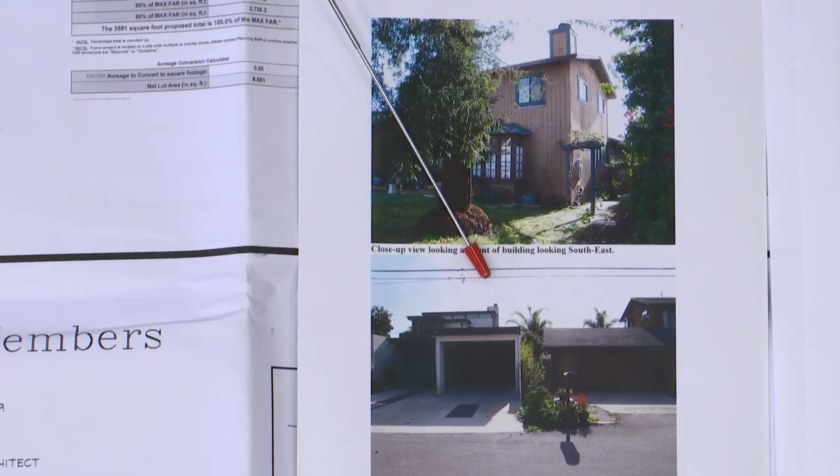Some shot of the side of the house, the west side. Here's a better shot of our neighbor to the west, so flat roofs. East side, that's the west side of the house. This neighbor is to the east. The west side neighbor is a one-story house. There's a hedge so you only see the top of the roof.

Here's a picture of a standing metal seam roof, which is on Cliff Drive, approximately there. A couple different angles, and then there's a standing seam metal roof that's on Flora Vista, somewhere about here. And so in the neighborhood, I could only find two, not going beyond what I thought was the neighborhood. I found another one. Oh, I don't visualize it right now. Okay, so there's already a precedent for metal roofs on homes.

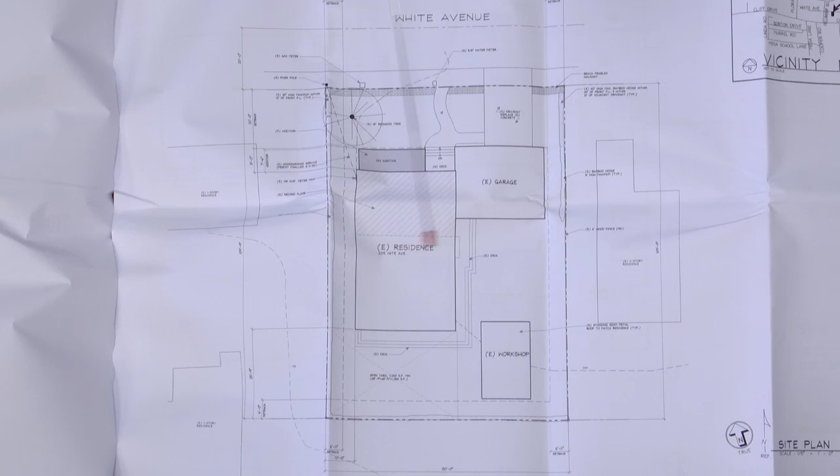So here's our site plan, and here's the workshop, the detached workshop. The two-story element is over this area right here, with a one-story garage and one-story back area and one-story workshop. Floor plan.

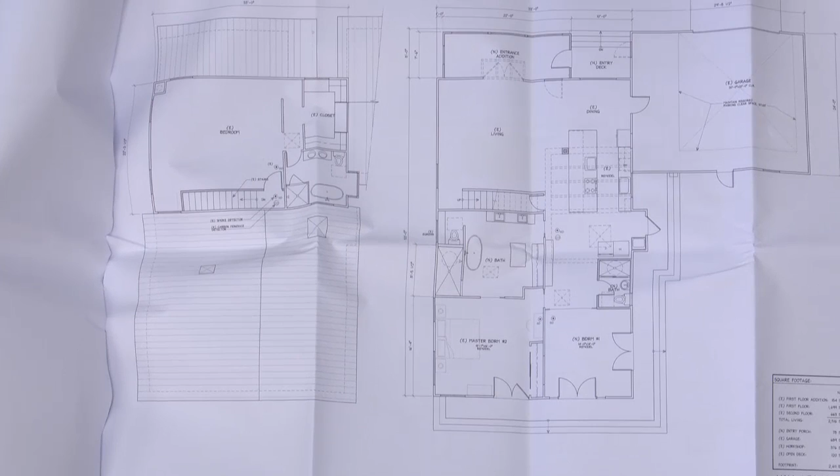Now, this is all existing, right? All existing except for what we were proposing to do, a front addition, this area here. So right now, there's that bay with the front door. Right now, this is an existing bay, and we were proposing to do an entry addition with the stairs going up the side and in, so that when you come into the house, you don't come in and it's like a straight shot through. I see.

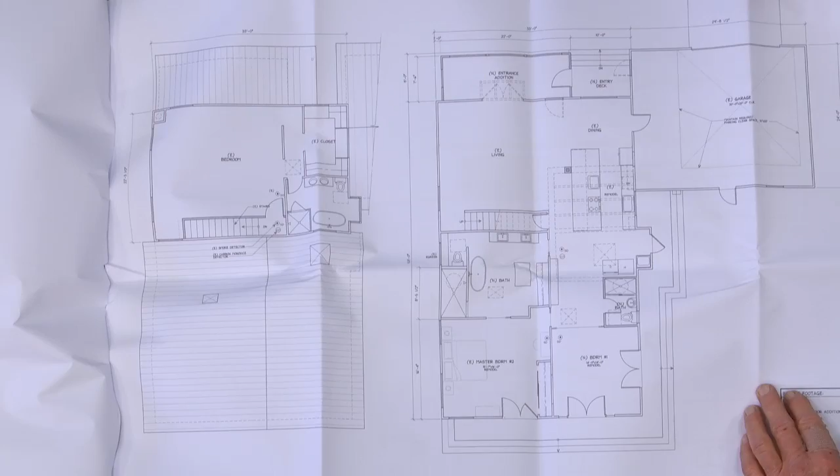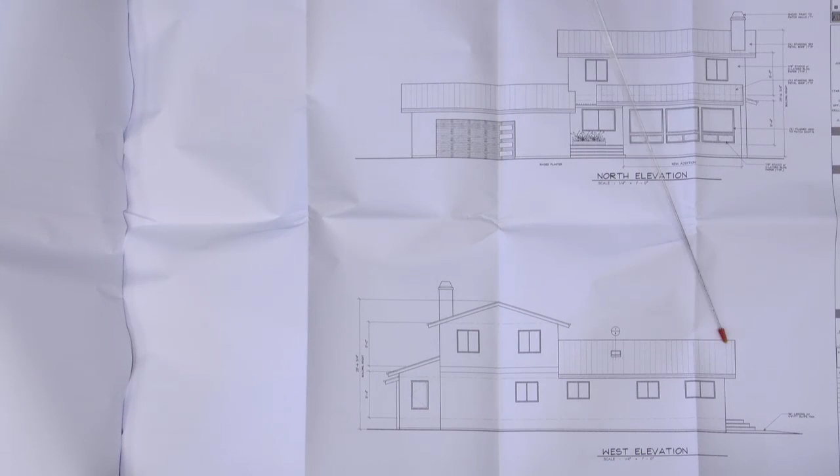So here's the house with the standing seam metal roof. Of course, this element isn't here. So metal roof over the garage or the main residence. And the colors that we're proposing. Oh, and we're going to do a new garage door. Right now, the existing garage door is not in good shape, so I'm going to do a more modern door.

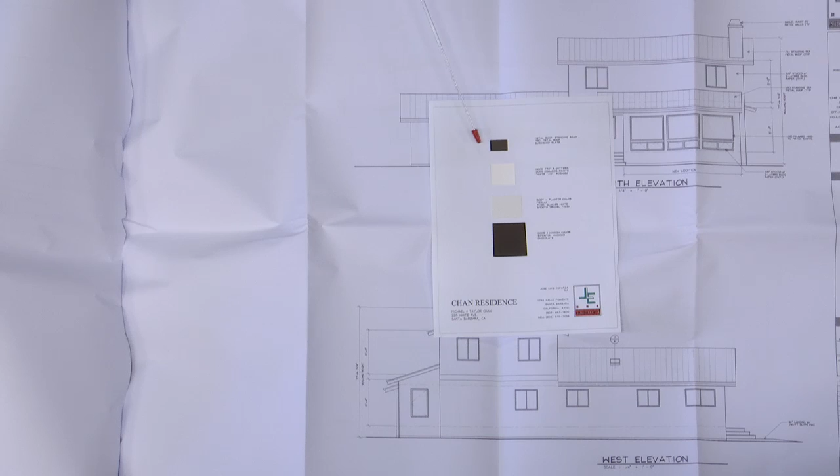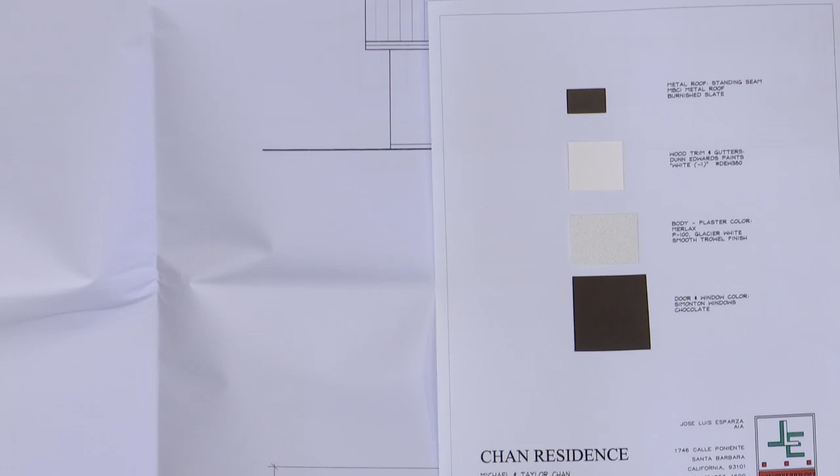So here's the roof colors that we're proposing. It's a burnished slate metal roof, standing seam metal roof. The trim will be white. The plaster will be also white, smooth trowel. And the existing doors and windows are this chocolate color, so it almost goes with the windows and doors go with the roof.

No, all the doors and windows are existing. We'll come to questions here in a second. Okay, so that's your presentation.

Okay, and we're here to look at the standing seam roof. Is there anyone in the audience wishing to address this project? David, did we get any written correspondence? No, we did not. The chair will then see no one come forward, close public comment, and bring it back to the board for questions.

Mr. Motisha, you have a question? You're taking off all this T111 and plastering the whole house. We're actually going to nail the T111 and put the plaster over top of that. The way that the windows are installed on the house is they have a trim. If we can go back to one of the photos, it has a 1x trim, so they're already proud of the siding, the T111.

Yes, see, this trim hides the reveal, what the window stands out. It looks like they were done, and some of the paper was even left a little bit wide as preparation to plaster over the house.

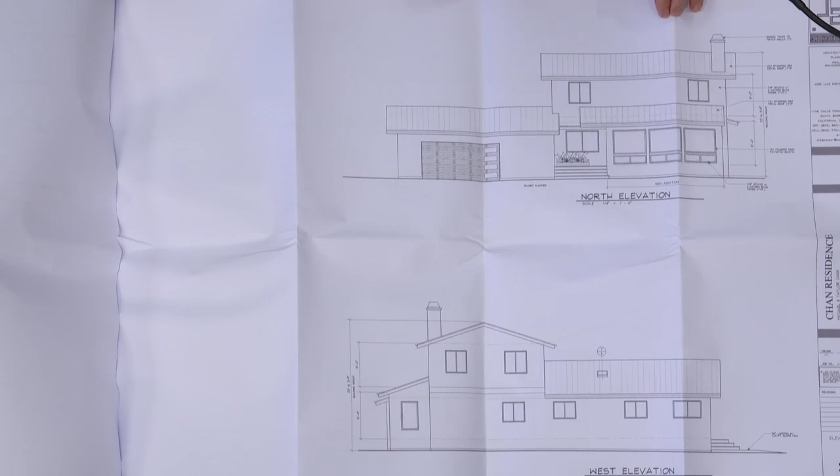Yes. In elevation, I put the line for the gutters, but I didn't put the downspouts. So I'm assuming you're proposing a white gutter to match the white fascia board, and then the downspout will also be white. And then I had a question about the bay window, but you've answered that. Siding.

Okay, and the other question I had in going down that little street, is there any parking restrictions on that street? Looked like people were parking on both sides. There's no sidewalks or curbs. I didn't see any parking restrictions. I believe there's a sign that you can't park certain days of the week for street sweeping, but other than that, I haven't seen any parking restrictions.

And David, there's no noticing requirement of the yellow sign requirement for this project? No, not for this project. Okay, have your clients talked to your neighbors about what they're planning to do?

They talked to the neighbor next door. Unfortunately, that house is up for sale. I'm not sure if they mentioned having talked to any of the other adjacent neighbors.

Essentially, you're here to try to get a read from us of whether or not we would accept the standing seam metal roof before you proceed to do the rest of your design work. Yes. All right, any other questions?

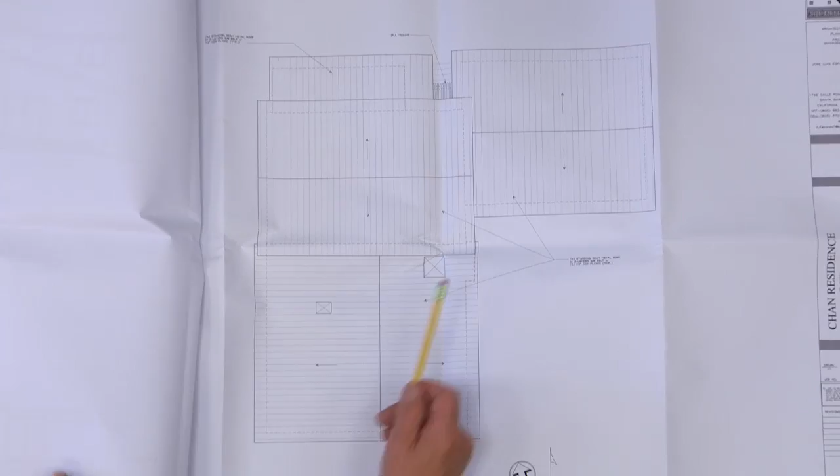Okay, any other questions? Let's go to comments. The applicant is wishing to get a read, an informal read from the board as to whether or not we would accept a standing seam metal roof in this neighborhood.

Yeah, I'd like to make a comment. I think due to the texture of the neighborhood, a standing metal seam roof at 12 inches on center, just making sure it's not a glaring surface, is appropriate.

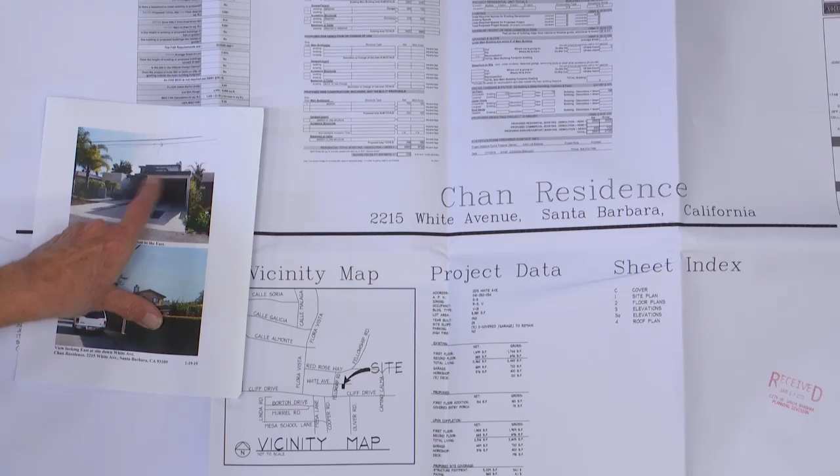The only question I have is, you're kind of playing off the colors of the house next door. This is interesting, it's got a charcoal gray and then a white. So it'd be interesting to see, is he playing off that, or have you seen how they would look next to each other?

Actually, he did take that into consideration, but he had photos of other houses. I'm not sure where they're located, but I'd like to see that combination - kind of like to see how he's at this. In my mind, it's hard for me to see a white trim with that.

And the other thing, I'm kind of wary of T111 because that stuff rots really badly. So if you're going to cover it with plaster, make very sure it's waterproof, because I live in a unit where we had to replace every bit of it because it was falling apart.

We do need to have it inspected and replace whatever panels, and do the Tyvek or double paper over that, and wire. Yeah, just be careful doing that. So you'll try to use some of that as shear? Yes, shear element, so that we're not altering the structure of the existing house.

My comments - other comments? I agree with Brian, I think the neighborhood is eclectic enough. Every house is different, and every roof in the neighborhood is different. There are lots of flat roofs, asphalt shingles, tile roofs.

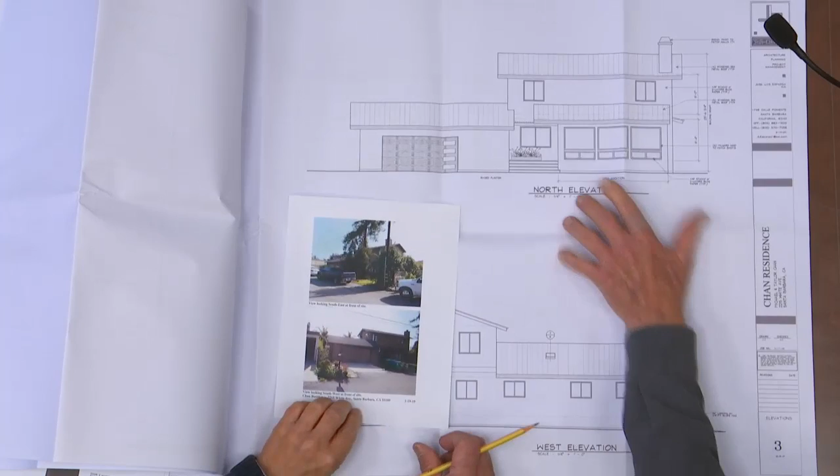I thought about that too, why this. But architecturally and aesthetically, I think it's not a problem. I think the reason the roofs are different heights is because the garage is a different height at the floor level. And to bring that over, you would maybe emphasize the fact that the roofs are different. Yes, doesn't bother me, I got it.

Any other comments? Go back to the AstroTurf issue. One of the things we'll probably be looking at when you come back is that you are moving out into that front yard with this addition. So we typically are going to want to see how you're going to deal with the landscaping around where that addition is, at the minimum.

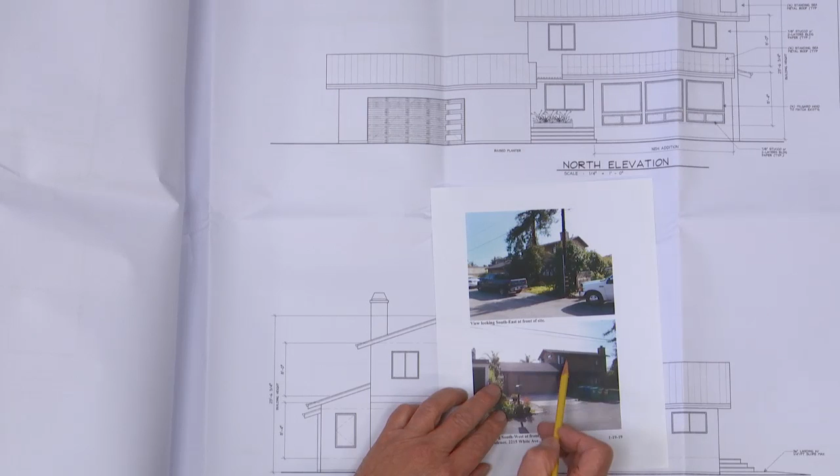The other thing I was puzzled about is the way this is drawn. It looks like the garage door is being moved over because this is in the center of this element, so it's just a question. Also, the roof, the way you've drawn it, the way it shows in the photograph, looks like it's coming across here unless that whole second floor is moving forward. So maybe just something to check as you do your drawings.

My only comment is I agree with my colleagues that in this particular neighborhood, I'd want to make sure we're going to need to give a motion because he's asking for a general direction. We're not giving it a formal approval, but we probably need to define the neighborhood. The applicant attempted to do that. If we agree with that definition, that's fine, but we should put that into the motion.

My only other comment is part of the challenge of these standing seam roofs being non-reflective is that even the dark colors are reflective and shine, in my opinion. Having gone out and looked at several of those dark colors, they can be problematic depending on where they are.

I agree with my colleagues, I think in this neighborhood it's not an issue, but just looking at the final color rendering is going to be important. And then the last comment is that I don't particularly mind your clients wanting us to make everything else white, except if you buy white gutters, what turns out is that white doesn't quite match the white that's on the fascia, that doesn't quite match the white that's in the stucco, and it may look a little weird to get all these whites to work together. I think that's maybe what bothers some folks, so you might want to look at that.

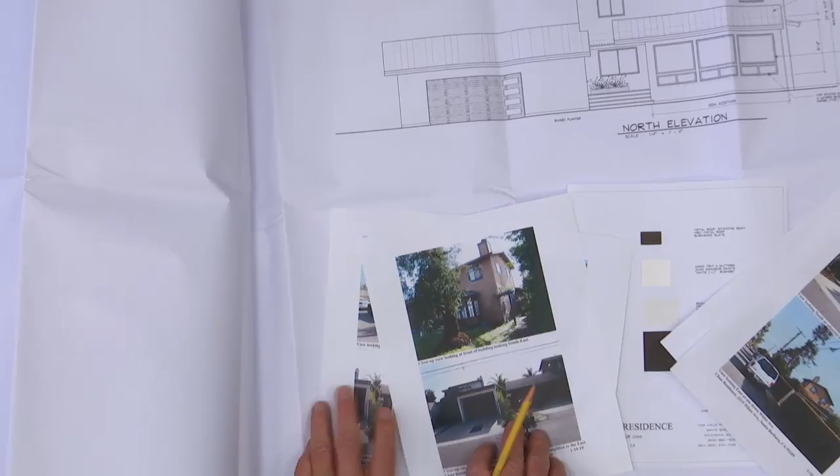I'm sure a question's going to come up when you do come back about the fencing, because I noticed there's a gate that's trimmed out in the current rendering of the house. I don't know where that little drawing went. There's a gate to the garage side and a fence that comes down, you can see it a little bit in this photograph. Is that going to stay? Is it going to change? Is it going to get painted? Whatever that is, that'll be kind of part of the things we'll look at when you come back.

Do we have a scale here? No.

I think that's drawn too long. Yeah, something's not quite right there. But anyway, he'll verify—6 feet, 8 feet too long, the whole garage. He can get that corrected when he comes back.

Okay, with that discussion, does anyone have other comments? If not, the chair would look for a motion that solidifies the board's general opinion on the acceptability of a standing seam roof. Any other notes for that motion? I'd suggest that if the maker of the motion is saying the standing seam roof is acceptable, you define the neighborhood—for guidance, you can look at the vicinity map on the front of the application.

Anybody able to make a motion? Yeah, okay, I can make that motion.

So we'd like to give your project positive comments for your standing seam metal roof. I think it would be beneficial to restudy your color choices for the gutter and trims, contrasting with the color of the metal seam roof. Also, really study non-glare as much as possible for this standing seam metal roof. And we'd like to define this eclectic neighborhood of Cliff Drive, Fellowship Road, and White Avenue. This will come back to the full board.

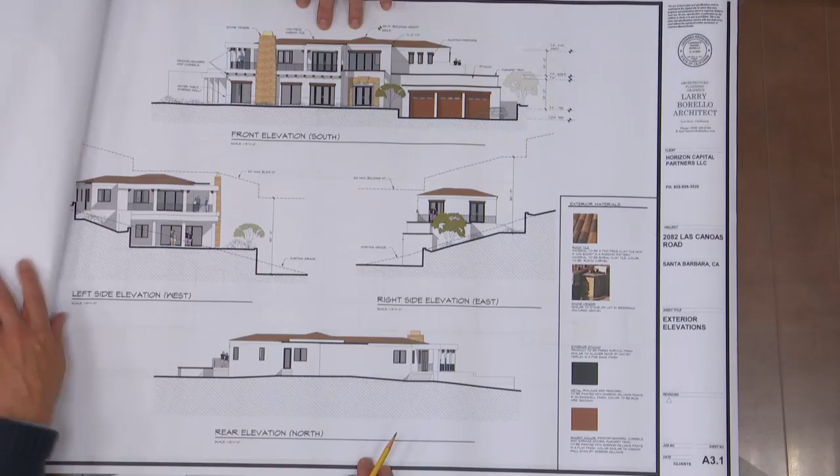Okay, so if you look, the floor plans didn't change, but the exterior, I've added the tile roof. And there is still some built-up roof, but maybe a third or two-thirds of the house is now a sloped tile roof, all stucco, and then incorporating some stonework that matches the style and color of the site stonework.

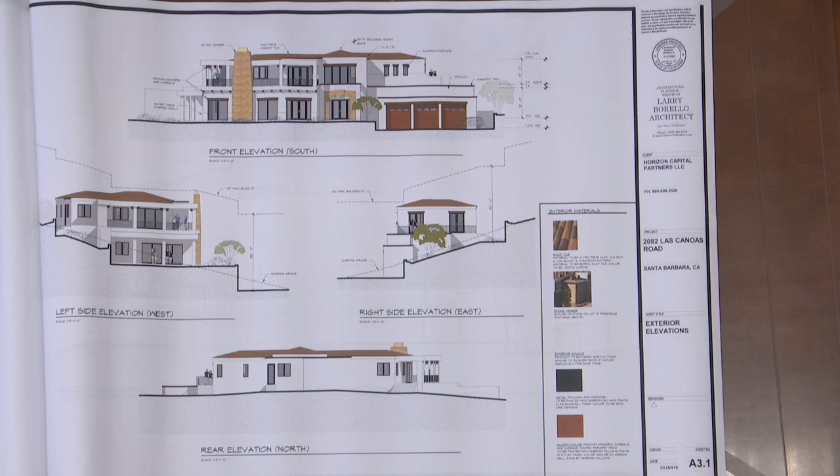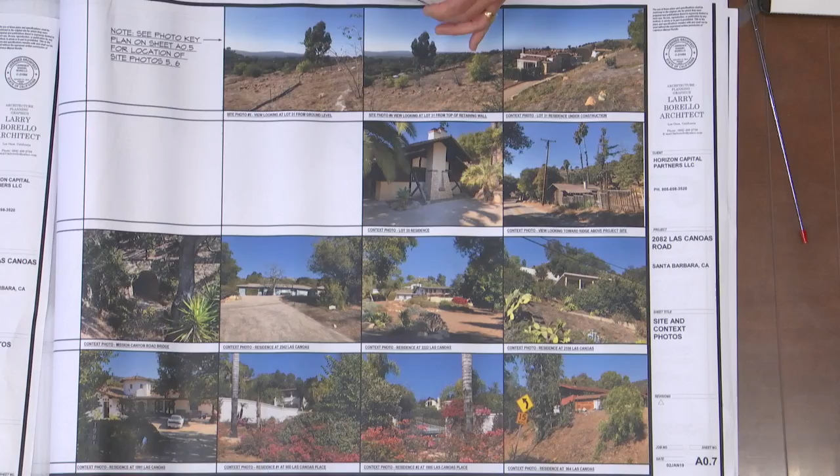And I did a little bit of homework. I went through the guidelines, and as the comment suggested, I went to take a look at the neighborhood. I took some pictures, I think they're on the third page. And what I did discover is there really isn't a distinctive style in that neighborhood. Your guidelines actually address that issue: neighborhoods without distinctive architecture should be designed to lead the neighborhood toward designs that are harmonious with the Santa Barbara distinctive built environment. So I thought the mission style would be the appropriate style in our situation.

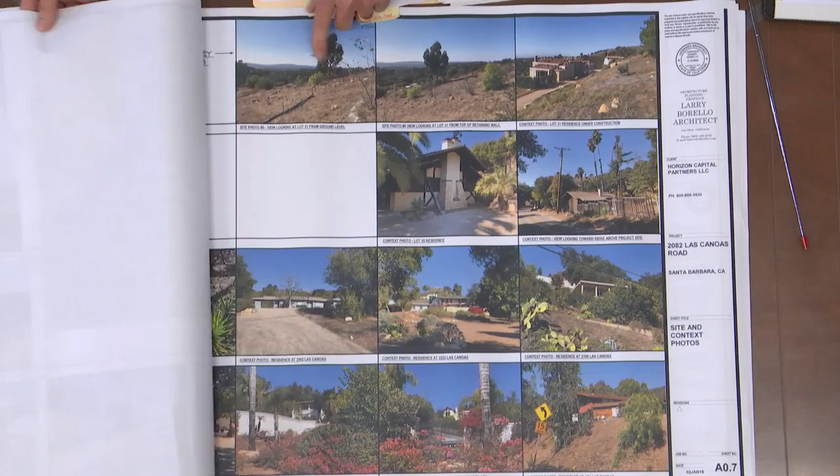So that takes care of the first two items. And then the third comment had to do with privacy issues with the neighbor to the west, which on sheet A0.5 would be what I identify as lot 31. And my site pictures on the next page, if you take a look at photo number 5 and 6: 5 is on the ground, right in front of the existing retaining wall, looking towards the neighbor's house. And 6, I actually climbed up on the retaining wall and took a picture in the same direction.

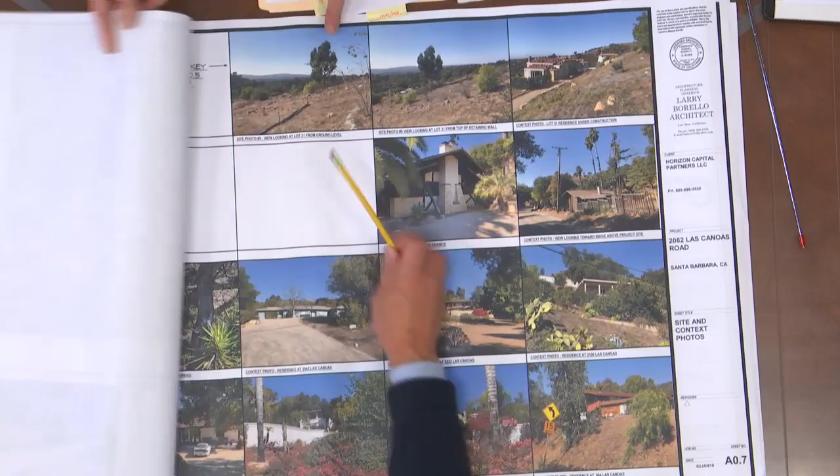So just to orient, that tree—yes, that would be this one. Okay, so the house you can see is off down below towards the left of that tree. So that's the house in lot 31, okay?

And this is—I climbed across the neighbor's property towards their driveway to take this picture. It's a Tuscan style, attractive house. Our house will have a similar tile colored roof, and we're going to pick up on the stonework as well. So I think it would be complementary to that house.

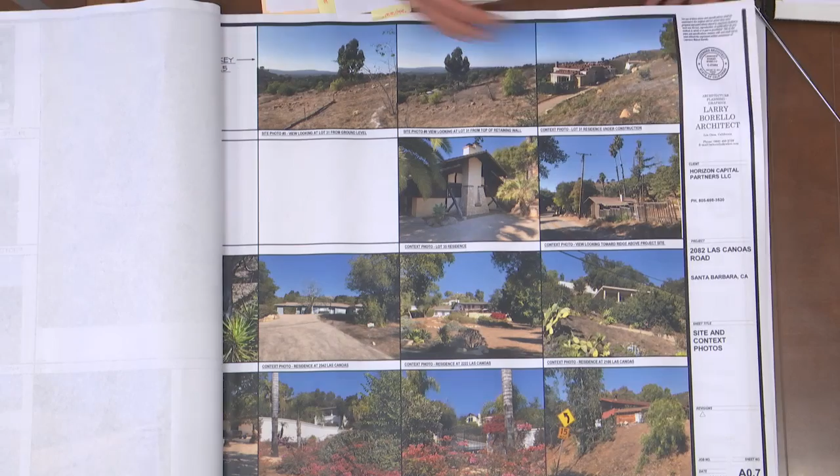But then if you go to the last page, to help look at the privacy issue or concerns, I have those two pictures again here with the close-up. And then the site section is looking towards the front of the house—it's conceptual, but that house is about 200 feet away and 50 feet lower. So we're going to be clipping the top of the roof, looking at their house.

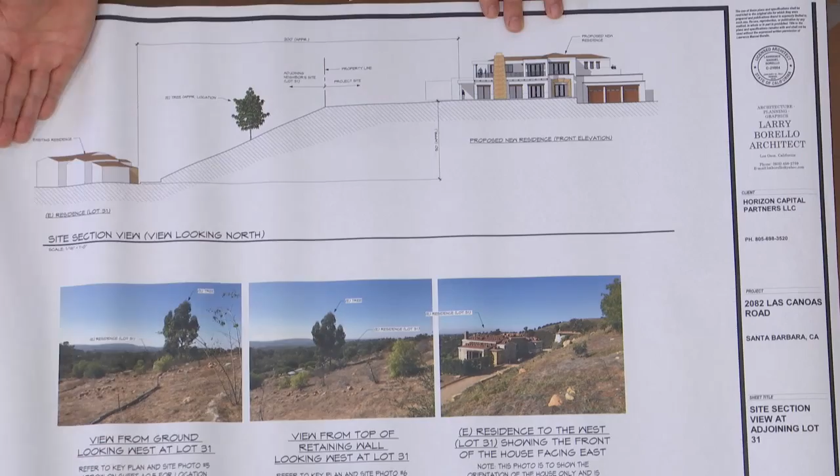And plus, if you'll notice, their driveway is facing our property, their front door is facing our property, and their private spaces are on the other side of their house. So they did a nice job probably anticipating somebody up higher, and we won't be looking down directly into their private space. Also, our view is out in that direction too, so there's a balance between making use of our view and their privacy. But because of the distance and the drop, it's not as big of a concern. And one more item regarding a privacy issue in the guidelines.

We talk about, under the landscaping guidelines, an appropriate way that should be considered to help create privacy between neighbors is the use of shrubs and hedges. And I think we have the opportunity to do that along the property line.

And the final item regarding the Tier 3, I've added a note on the site plan saying we would address any Tier 3 comments. And that's the end of my presentation. I think Kevin, anything you need to say? Sure, thank you.

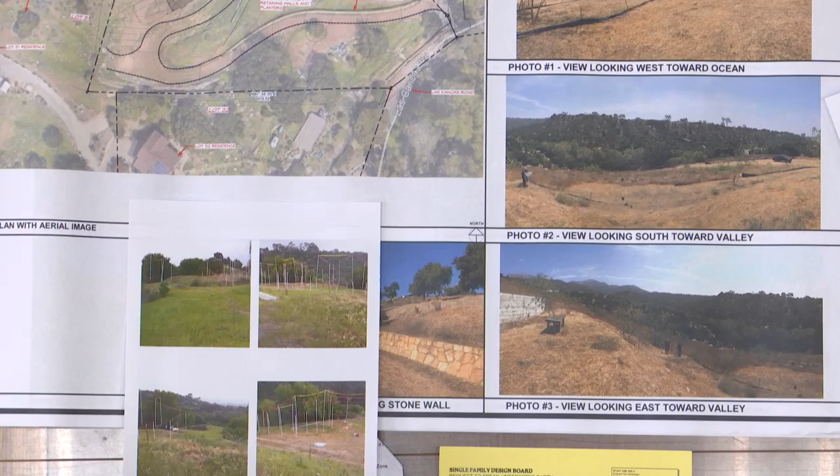And so it's really hard for my husband and I to look at this plan and really see what kind of view they're going to have of our place. And they thought, the architect thought that our private space was on the other side. It's actually not. Are you talking about Lot 31? Is this house under construction? Yes, okay, yes. We have this guest house, and that's our main house. Okay, and this here, I don't know if you're able to see, if I'm supposed to do this on this one.

This is our private space, our master bathroom, which is what we were worried about the last time we showed up for this in October. We've grown some hedges to block the view from the house that shares our driveway, but with a house up high, I think they're going to be looking straight down into it.

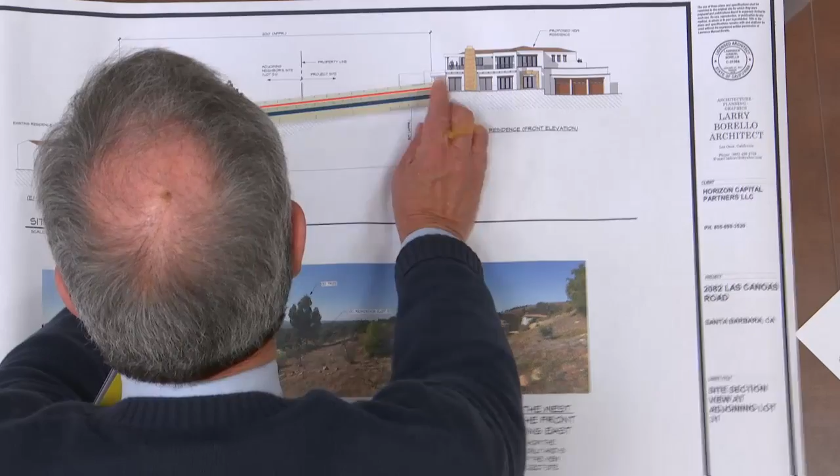Let me look at this. So if that's a 6-foot-high person, and they're going to look straight down into your house, that's the line of sight. They're looking over the top of the roof. The one place they might be able to look down into here is if you scale this at 6 feet. This is what it's talking about right there - that's our master bathroom. If you're 6 feet tall, you're roughly right there. You have to be right at the property line to look down here.

It's 200 feet away. Well, it's not the distance so much, it's the angle, and I think they're going to be looking straight down into it if they stand at the edge of the property, but if they're back here, what this demonstrates is they can't see this house.

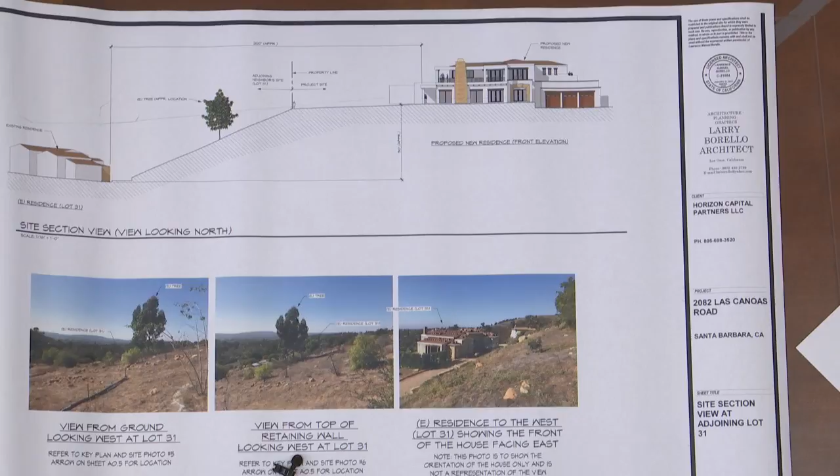There's no story pole recommendation here? We'll have that conversation. We would really feel better about it if there was one. I'd also like to say that we went through incredible expense to build this.

I wish you guys would go up there, it's really special. We have been up there, ma'am, we understand how much money is being spent. So we just would like to have the house next door do the same. Thank you. Okay, anyone else in the audience?

Okay, let's bring it back to the board for questions. Who has questions?

Can you show us on that plan where along the property line your hedge will be, in order to both assure the neighbor of privacy and to illuminate for us where that is, and if you know what the hedge material is going to be?

I'll answer your second question first. We haven't gotten into that. I don't see any hedge design drawn yet. No, we haven't. I don't know, where do you see a hedge? They were describing that he was talking about a hedge, but we don't have a landscape plan yet.

But which property line can you show us? Is it the one adjoining their property? It's here, correct. So when you plant your hedge, that will help increase the ability to screen the properties.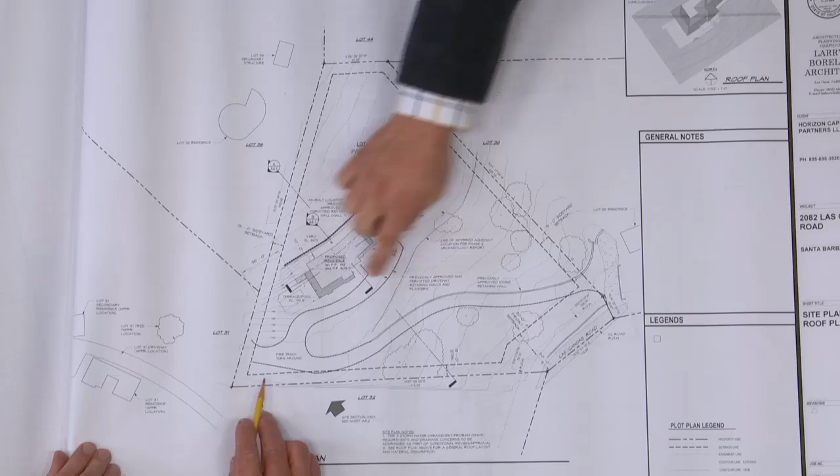I have a question - this is weird, is this like an access to the other property? Is that an easement? No, that's just the driveway up, and then it just stops here. Well, there's technically a hammerhead turnaround for the fire department, that's the reason for that. It's just not really developed yet, that's sort of a rendering.

All right, other questions? If not, let's go to comments. Who has comments? Yeah, I have a comment. I hadn't seen it before, new to me. And your property is 3 acres? Yes, yes.

Well, this is a question for the board, and I'm open - this is the reason I'm bringing this subject up. Why are we... I don't want to use 'adamant'... why did we change the style? He read it out of the guidelines. No, why did we feel that... hold on a minute, you want me to answer or no? Let me finish a comment before you respond. Yeah, I want to hear your comment, your response.

We've done this several times, changing drastic styles of houses on 100, 60 or 200-foot lots right next to each other, where everybody's looking down on the property, and neighborhood compatibility didn't fit the neighborhood - putting a modern house in. We've changed things like that.

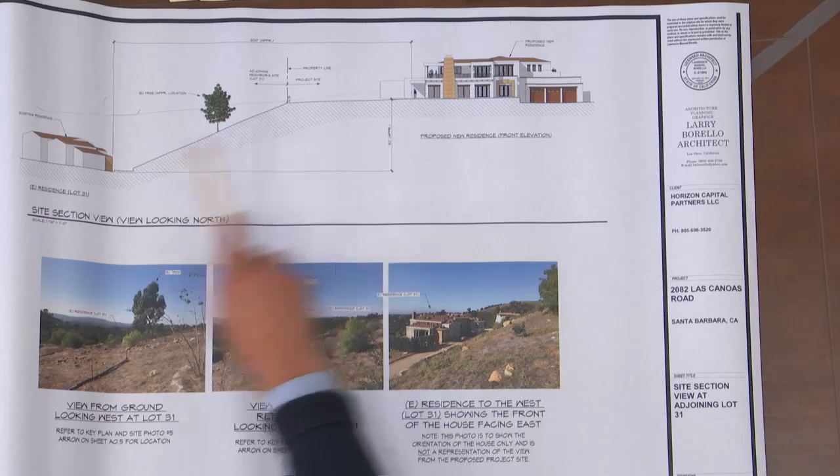I'm of the opinion that all of these homes are far enough separated that unless somebody really wants to look into your bathroom window, you're not going to have that case anywhere in this canyon. And yes, with a little additional landscaping, we're 200 feet away. I think this line of sight really demonstrates nobody from this house can see that house, and barely see the roof. One of the things we always have to be careful about is photographs, close-ups, et cetera, can be deceiving, so you have to make your judgment on what you've seen on site versus photographs. But I think I can safely be assured there isn't going to be a privacy issue.

With regards to story poles, yes, they are certainly used by this board from time to time, but the board understands that requiring story poles is a very expensive proposition. They have to be done by a certified civil engineer, sets of drawings have to be filed, there are inspections going on, and there are 3 different levels of story poles we can choose from.

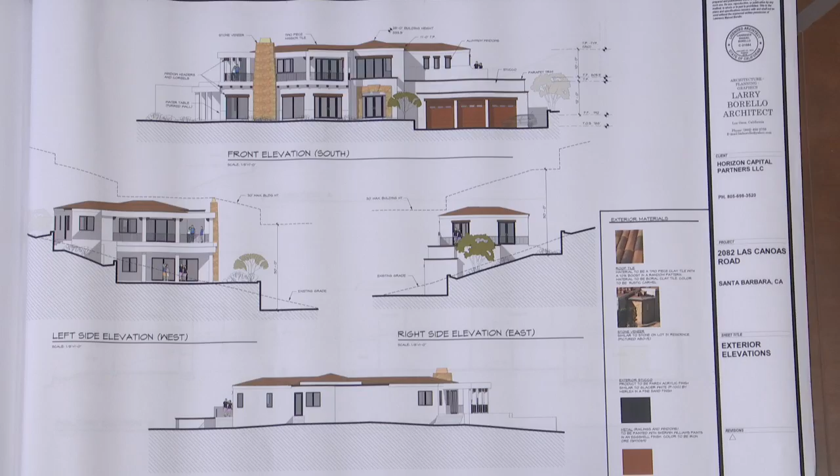I would like to hear my fellow board members weigh in. I don't believe story poles are necessary for this application. I think the architect and the owner have done an admirable job of listening to us about architecture that can be compatible with the neighborhood. Again, as we go through this process, the definition of neighborhood should be addressed. The home still has a contemporary element to it. So I'm satisfied that the architect has addressed our concerns, that the applicant has addressed our concerns.

There are 2 things, though, one technical question I need to ask David. David, this has been presented to us today as something we're not able to make any final appealable decision on, is that still correct? That is correct, but since the agenda was published I had more opportunity to review the environmental assessment. It is okay for project design approval, but because it wasn't agendized as such, we can't grant that approval. I would recommend that if the board feels the project is approvable, they make that recommendation in their motion, so when the project comes back, this board can be ready to take that action. And the board also has the ability to send this to consent calendar. That is correct.

Two comments on the ability to give you any kind of approval today. Technically, David just said we can't, so that's a concern, because obviously you'd like to achieve that today. But if the board is inclined to accept this as an acceptable design, we have the option to send it to consent calendar, which is the 2 people reviewing every Monday at 11 o'clock. Currently myself and Lisa are the 2 reviewers, so that could go to consent calendar.

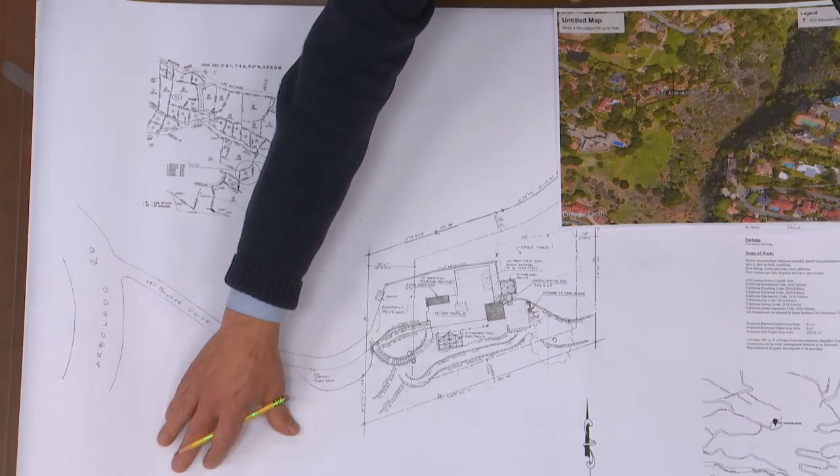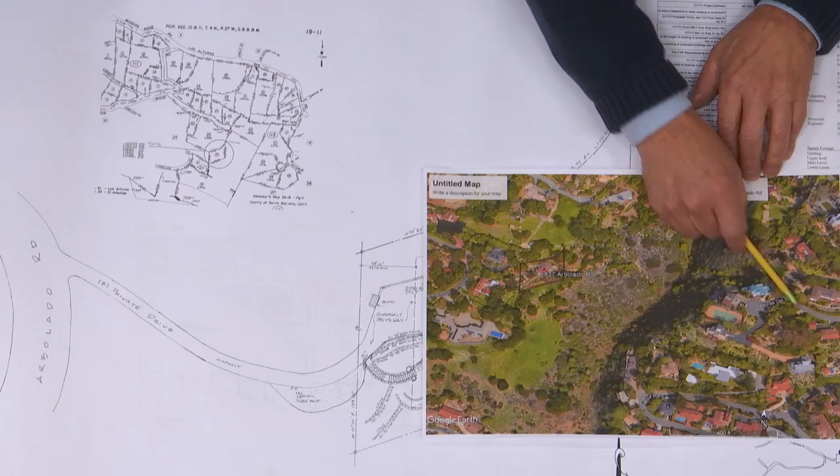Let's start by orienting you. I'm going to use two documents here. One is the plans - this is up on Arbolado Road. The property sits in from the roadway, with residential property on both sides. This is the aerial photograph, which may help. This is the curve on Arbolado Road, with an entry driveway here. This is the house, which sits overlooking the canyon that drops off the Riviera. The next closest street is Loma Media, which winds its way up into this dead-end street and continues all the way up through here.

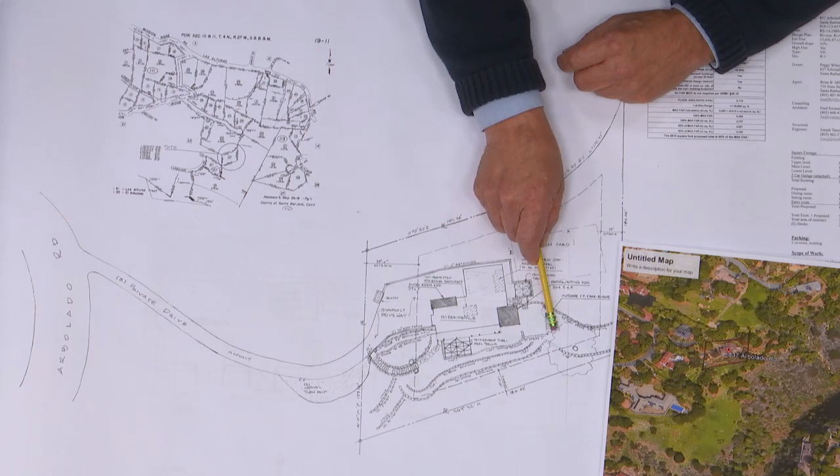The project consists of two additions to the existing home: one is the reconstruction of an open-air entry porch into an enclosed glass gallery entryway, plus a one-story dining room area and a second floor sitting room off the master bedroom, which sits right here. There are also some small minor additions in the yard for an outdoor gas-fired fireplace and a gas-fired barbecue with a little counter for food prep.

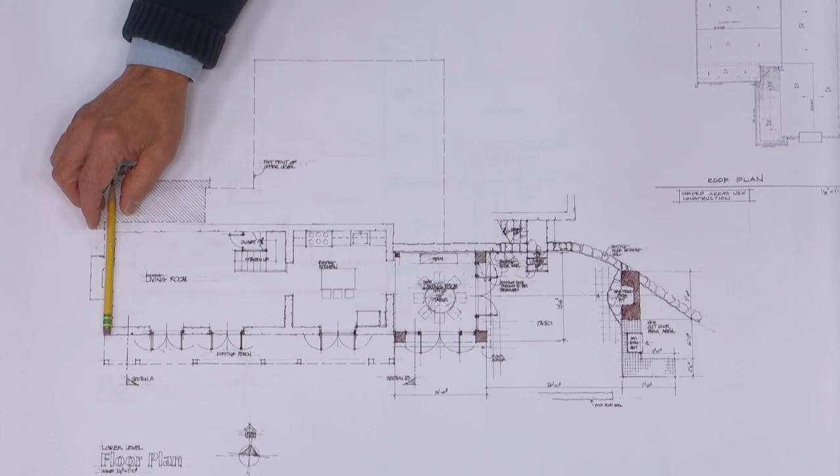Going quickly through the plan, this is the existing lower level of the house. This piece was constructed, we think, back in the 20s or 30s as a stone masonry structure, probably two floors, relatively small. In 1981, it was added onto in this area, which we'll show on the upper level. The porch we're talking about is here, and the first level dining room is here, replicating the exterior stonework, with doors opening onto the patio areas, existing patio wall, and steps. We'd like to add an outdoor gas-fired fireplace, a barbecue, and a little counter area for food prep.

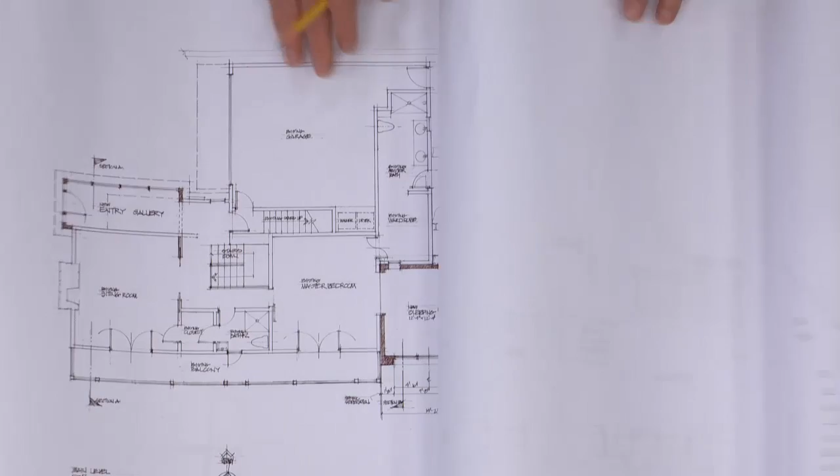On the second level is the addition, above the dining room, of a little sleeping porch or sitting room off the master bedroom. The original home was this size, with a Monterey style balcony off the front side facing the ocean. The hillside is here, the garage, and outdoor areas here. There's also an upper level above this with a couple of bedrooms and a bath that's not being touched, so it's not included on this set of drawings - it's in the existing drawings.

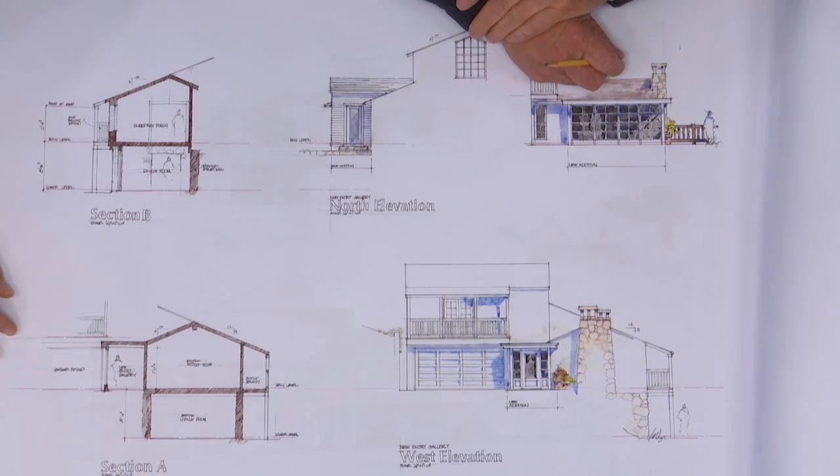Here is the rendering of the entry, the redo of the entry porch, which is covered right now. Let's see if I've got photographs - David, do you have pictures? The other set doesn't have all the pictures here. Thank you.

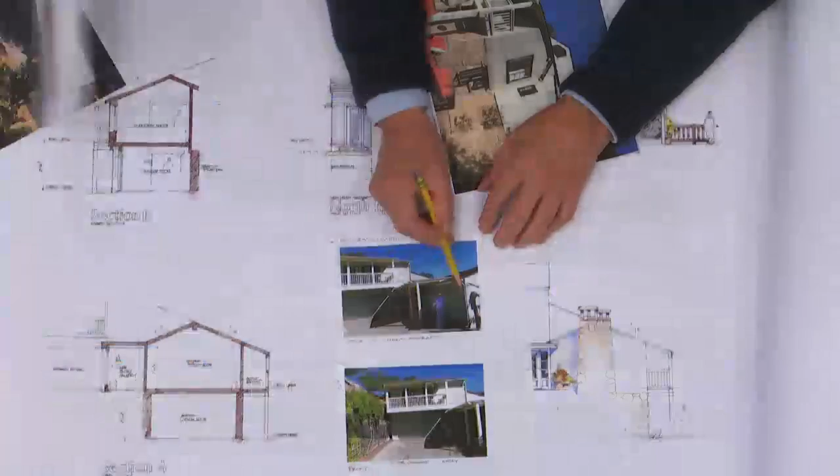So essentially it's this porch right here. We're going to enclose that and extend it out a few feet just beyond the front wall. So that's what this is, with a new door and a new readjusted roof over the porch.

Let's see, do I have... what else we got? I think that's the main one for the front part of the house.

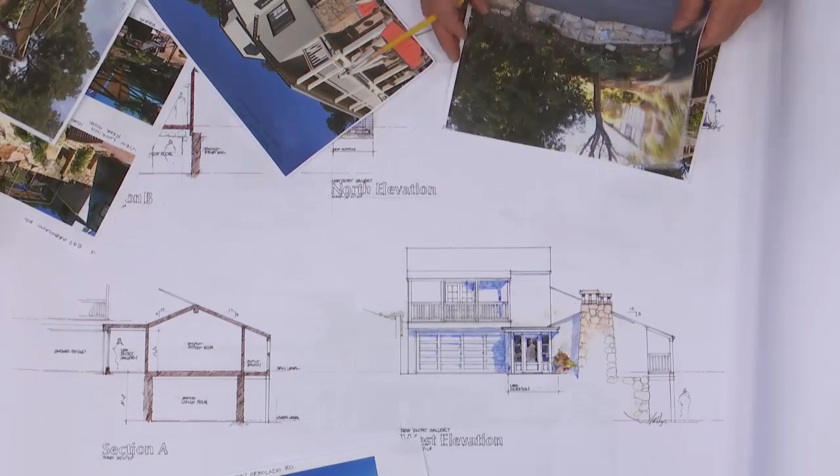This is actually the entrance off of Arbolado Road. That's the driveway coming back in. And this is the overall view of the house from the Arbolado Road side of the home.

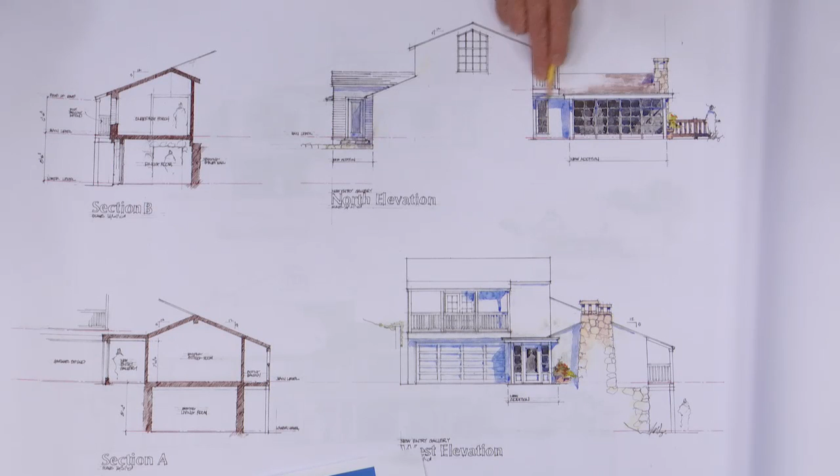Let me just go through. So this is the side of that porch, glass enclosed. A new window here, that's existing wall. This is existing roof, existing fireplace, existing upper floors, existing here. This is the new addition off the sitting room, sleeping porch off the backside.

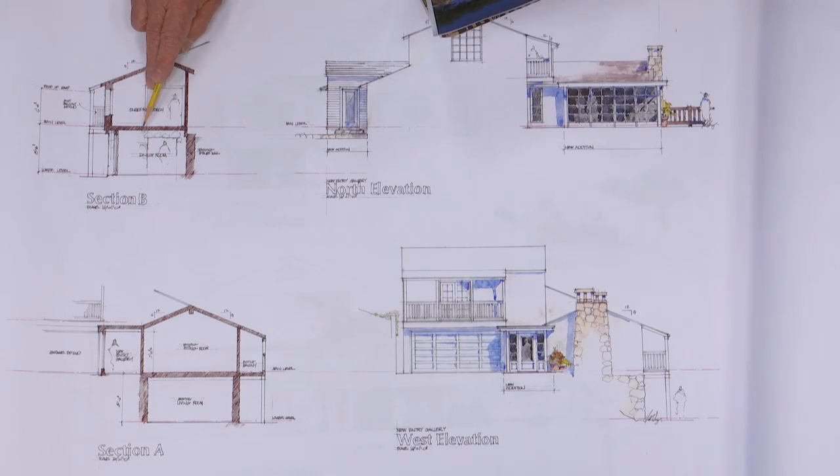Here's the sections, elevations, floor heights to plate heights. Everything's relatively low. It's interesting that historically this house was built as this rock structure, so the finished floor at the second floor is only 8'6". So the ceiling in the dining room is going to be like at 7'2". Because that's just the whole way the house was built.

And so then when the additions were done later on, again, all the plate heights are really low. So this is 6'6". Here it'll be a little bit higher just because we're trying to get it to snug into the existing roof. And I have a roof plan.

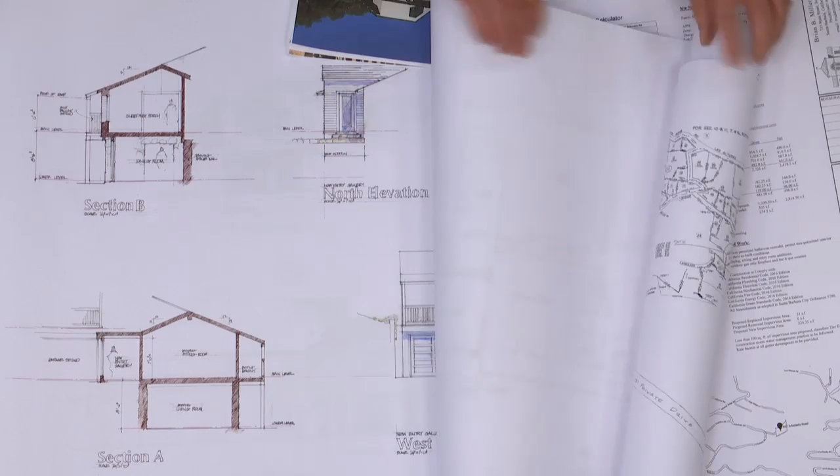We have a roof plan up here. This corner... whoops, where is it? That one there? There it is.

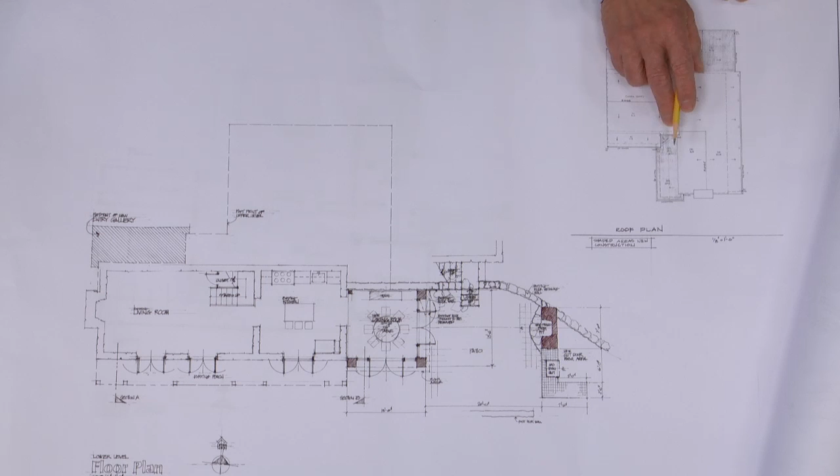So here is this addition where the dining room and sleeping porch are up on the second floor. So we're snugging into the existing roof here, and this is the flat roof over where the porch is now. The roof on the porch right now slopes a little bit, but it's like an inch to a foot slope, and we're going to flatten that out a little bit more.

Okay, so that's that. So let me show you then elevations. So we forgot to get... just stay here. So this is what we presented to the consent board.

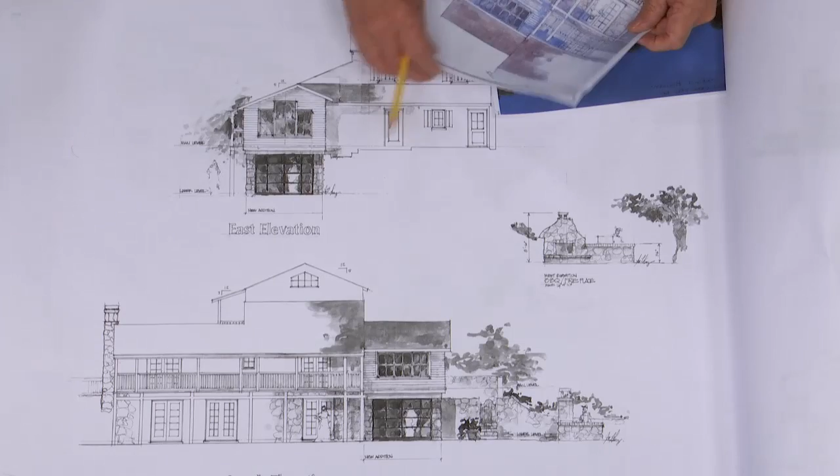These are little portions of what they look like colored. For some reason, we can't find the color drawing.

But this is the sleeping porch or sitting room off the master bedroom. So this roof just leads right into the existing roof. This is that lower level. And this drawing depicts...

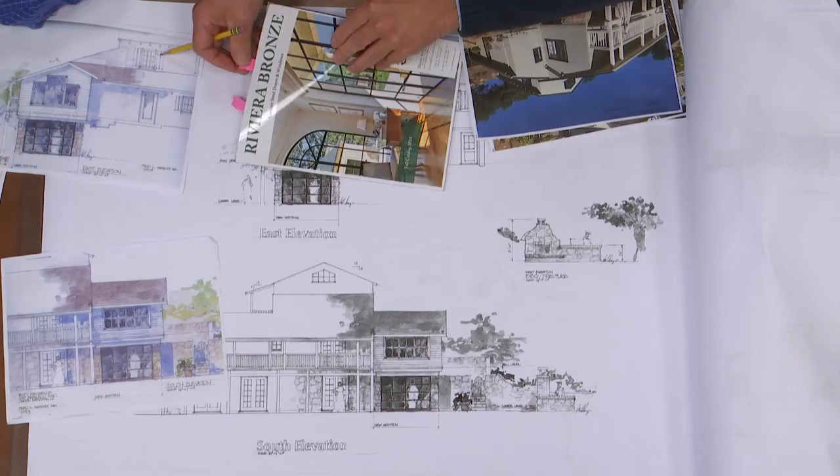This drawing off both sides depicts a steel door system, very similar to this one right off of their catalog, that system right there. Okay, so that's basically this door system here.

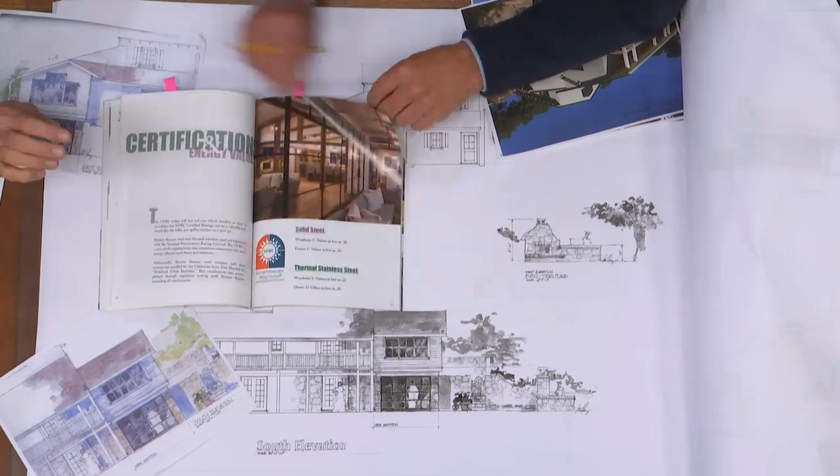And I think we got another... that's just the colors. Anyway, similar to that, that's the idea of doing that. And so, in essence, that's filling up this corner. So this addition kind of sits in here, fills in that corner.

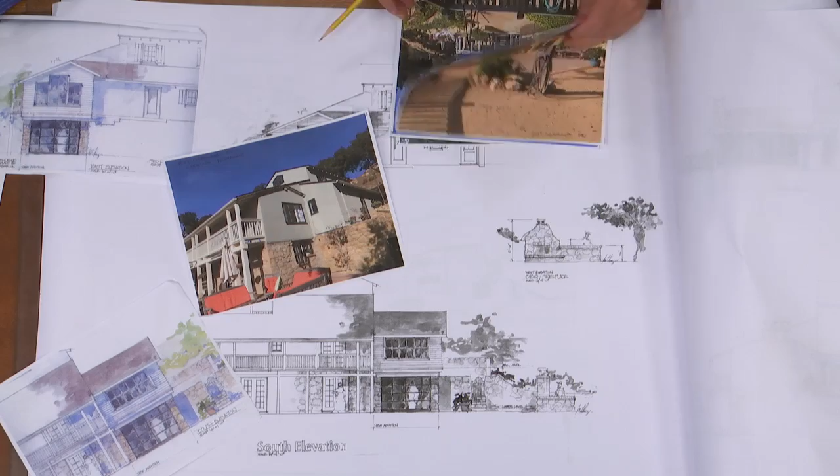The entry is in the back, and the entry's corner is in the back on the other side. Okay.

And let's see what else I need to show you. I think that's it. So it's going right in this corner right here. Yeah, it's right in there, filling that corner up. Two-story, right there, yeah. So it's filling in this corner. Okay.

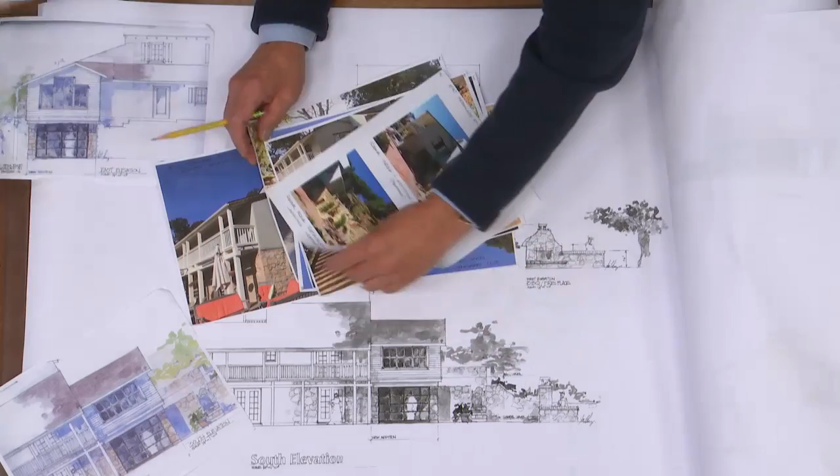So what we have here is a fairly eclectic piece of architecture that's been added to over several periods of time at different points. The addition up here was done by Sharp, Mahan, and Lenny back in '81. We think a lot of the other work was done hither and yon over the years.

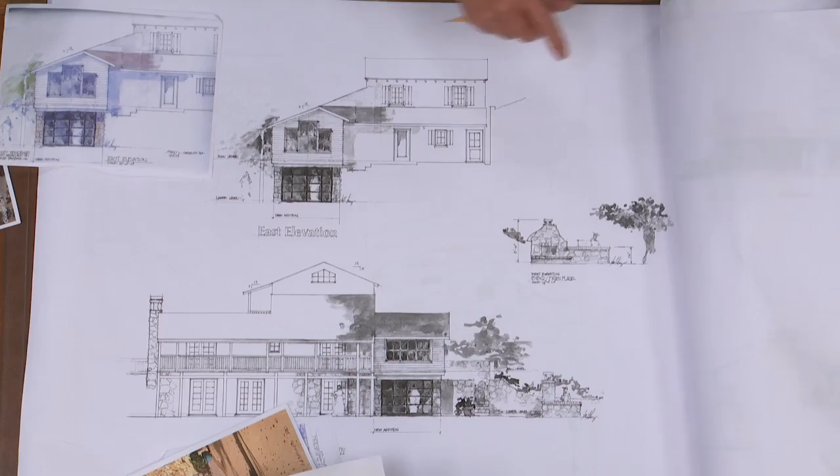There's an interior staircase that actually has to get a permit, put in by the current owner several years ago without a permit. So there's this interior staircase that has to go in that's very contemporary in look. So you can forensically just go through and see where things have been added and patched in and changed over time.

So that's what we wanted to get approved. And consent said no, it really isn't compatible with the rest of the architecture. But what I'd like to share with you is some additional examples of how people treat different periods of architecture in the same building.

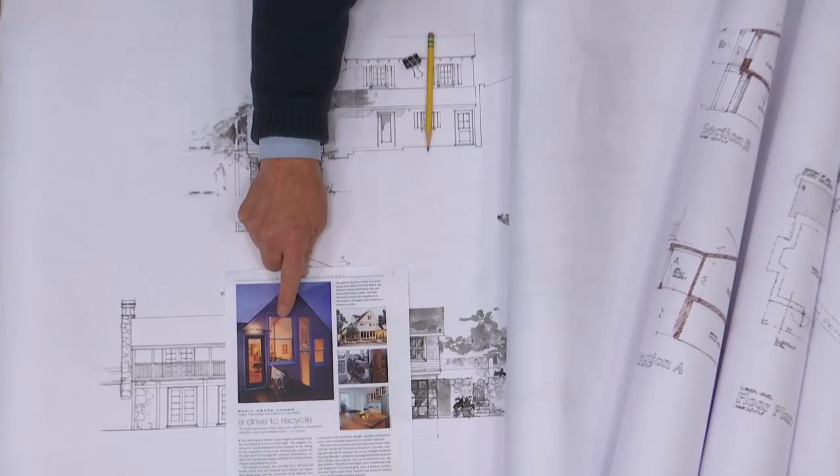So here's an example of using very traditional fenestration elements, but in a very different way. So that's not a very traditional approach to the rest of the house, which looks fairly traditional.

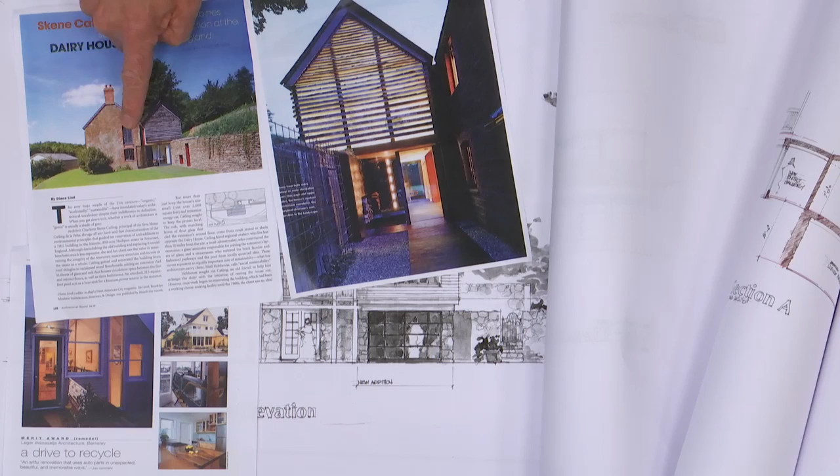Here's another one where this is an old barn structure, stone structure, with traditional window fenestrations here, but then an element that's been introduced that's contemporary right next to it.

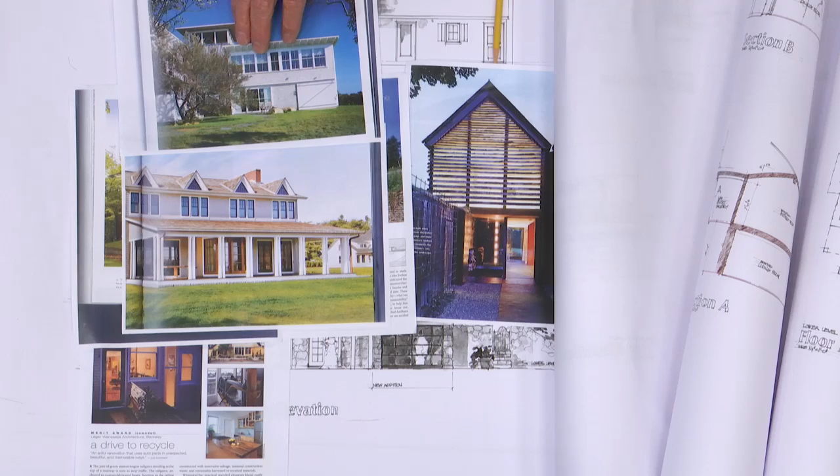So we did go off and study a more traditional approach to these sets of glass doors. And that looks...

Why are these stapled? I'm doing this upside down. So used to, that's fine. I need to see. You guys want to see these?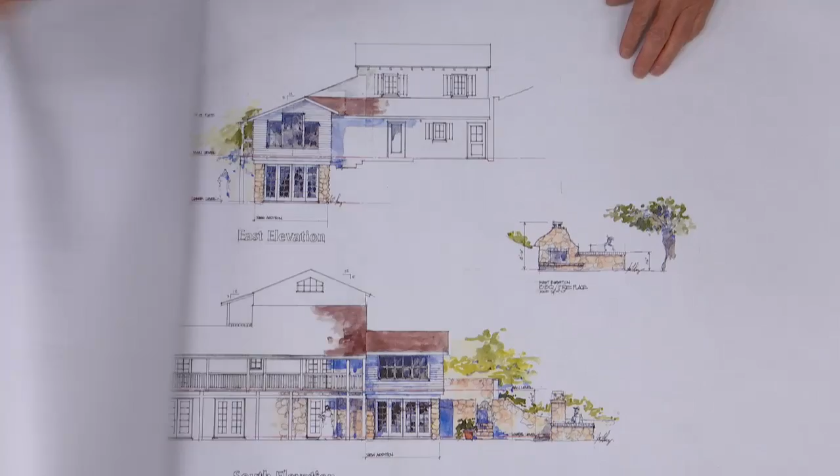So here is that drawing in color. And then here's a more traditional application of traditional French doors, 5-light French doors, clad, that would be used in lieu of wherever that other picture was, the giant steel window. Yeah, the steel windows, in lieu of that.

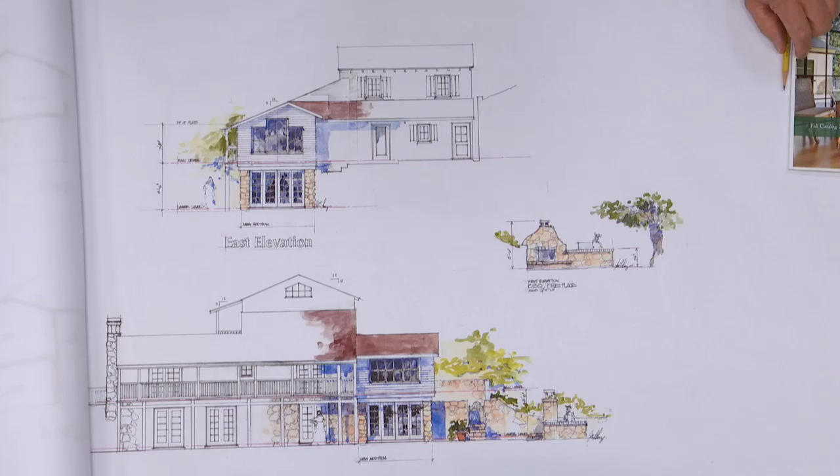The other thing we want to show you is what this looks like across from the canyon. So this is a sketch done right off of the canyon look. At one point up in Loma Media, there's a pop-out where you can look back at this property, which is hidden behind these oak trees. So it's back right in there, you can't see it.

This is the property above. This is the neighbor who actually showed up at consent calendar because she was concerned about how high this addition was going to be.

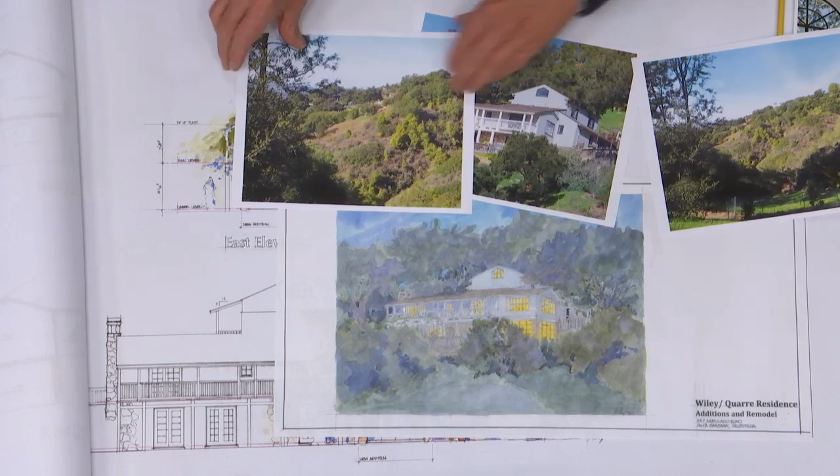This is a little bit further, where I could wedge myself in to see the site again, but it's that right there, that's the edge of the site. I'm higher on Loma Media. Then lower in Loma Media, you can see it at the turn we showed in the photograph.

Over this house. Where are we? You're looking north. Right here, that house is this house. So if you park right here, you can take a photograph. That's what this photograph is, looking straight up.

And then, using the telephoto lens, I can get a little closer, and that's what this is, a tracing on top of that drawing showing the addition. So this depicts the steel-clad window system and the wood window system on the second floor.

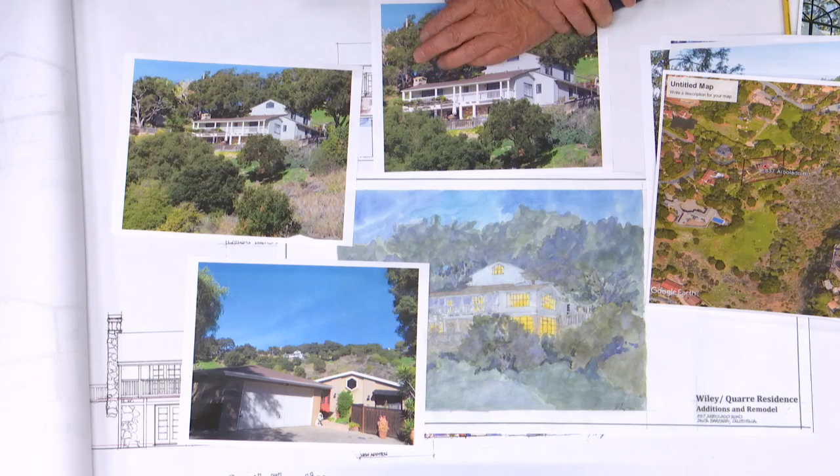Our client really would prefer this, but realizes there is an economic challenge to making that decision. We haven't been able to get a final price from the steel guy, but we venture to say it's double the cost of traditional French doors, which, for your general knowledge, clad French doors, typical 6'8" by 6'0", a pair of 3.0s, run $4,800 just to buy the doors to start with. That's not installing them. So this is an expensive proposition.

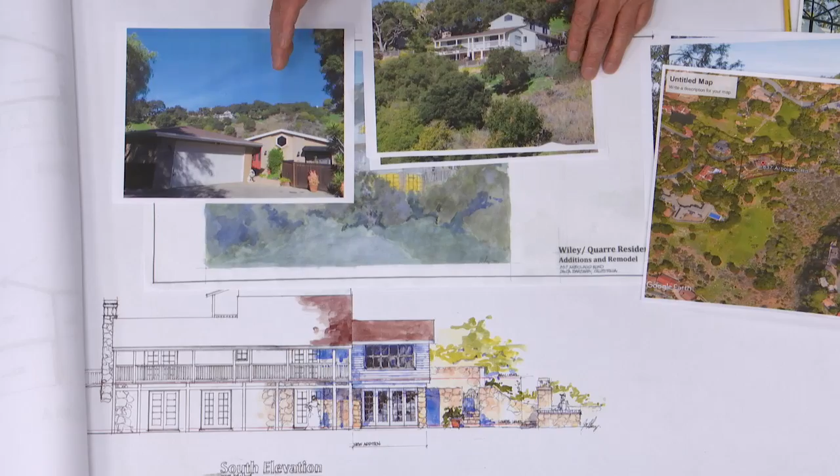The client would like to use these steel windows, but understands if it's not affordable, she would fall back to this pair of doors. We'd like the option to do either one. We don't think they have an impact on the neighborhood — they can't be seen from the public right of way off Arbolado. The house can't be seen at all, except as demonstrated, it can be seen from a few points across the canyon, about 1,000 feet away at Loma Media.

We believe this is a unique approach, and the guidelines, if you read carefully, say the board needs to consider it, but as I've said many times, they're only guidelines. The board has the wherewithal to interpret and make their own decision.

So that's our presentation. The reason we brought this back from consent calendar, Lisa and I, is basically two reasons. One, the windows proposed here are basically horizontal — I mean, they don't look horizontal, they've been changed. In their consent presentation they were horizontal, while every other window on the house was a vertical window, broken up vertical windows. Now it's been changed.

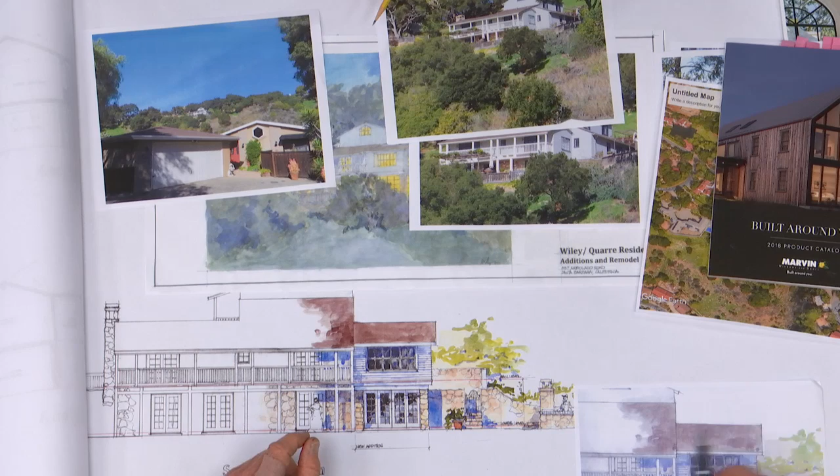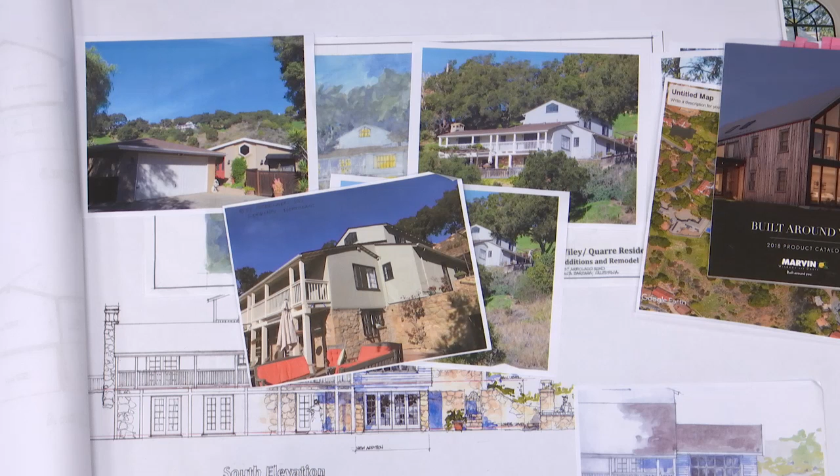I was going to comment about that too. The other reason is that all these are wood windows here, and to add this whole two-story element, I think 3 windows were taken out that were steel windows, which had been put in during a later, more eclectic design phase of the house. Those steel windows are coming out, and this salvaged wood window, and that wood window below, are from the original house. So the two reasons are: the windows were presented horizontally when they should be vertical, and they were presented as steel casement windows, which didn't fit the design of the house, the aesthetic look of what the house is.

We didn't make a decision. We decided to bring it back to the board to decide, because the house is located in a canyon that basically nobody can see, and looking at two sets of windows that throw out a lot of light, our guidelines say don't light up the whole night with windows, and that's what we're doing here. You look up at that from Arbolado Road and from the lower house down below, right into that canyon, looking south. That's the south elevation.

Questions? Before I go further, are there any comments from the neighborhood, from the audience? Nobody? Okay, any questions from the board?

So what is this siding on this side? Shiplap siding. So the rest of it is stucco up on that level, and it's stone along the whole bottom. Top is stucco, and this addition is the wood.

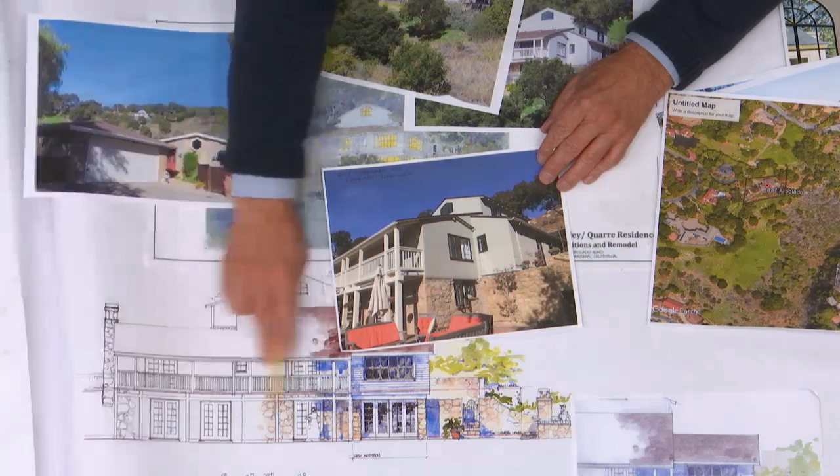I had a question. Is the addition going to have stone wall interior walls? Yes. What's happening is, if you look at this stone wall, we're just going to take out this window and take the floor down. That'll be the opening to the kitchen, which opens into the dining room, and this wall becomes the back wall of the dining room. So we're retaining all the stone features, because this first floor on this side of the house is all stone, but it's been treated very contemporarily on the inside.

Another question - are there any code violations about having very low ceiling heights? No, you can be 7'6". And this is lower than that, right? I thought you said 6'6". 7'2". So I don't think so, given this existing condition. We'll find out when we get to the building department, but I don't think it's an issue. I think it has to be 7'6".

Habitable space - and then this is a comment, not a question. I think a kitchen and a bathroom can be lower, to 7'2", but habitable bedrooms, living rooms, anything like that has to be 7'6". Okay, we have to check that when we get there.

We have a 4-inch problem. And the only other thing I would say is your conclusion on steel windows makes sense. I put them in my house and they came out to $200 a square foot, just the steel windows alone. I think the French door concept with the wood looks a lot more appropriate for what you're trying to do, and would be less money for your client.

Any other comments? I have one other comment, or sorry, a question again. This height here - you said that was measured and is drawn correctly. Your picture doesn't show that. Your picture shows that this right here is taller than the window.

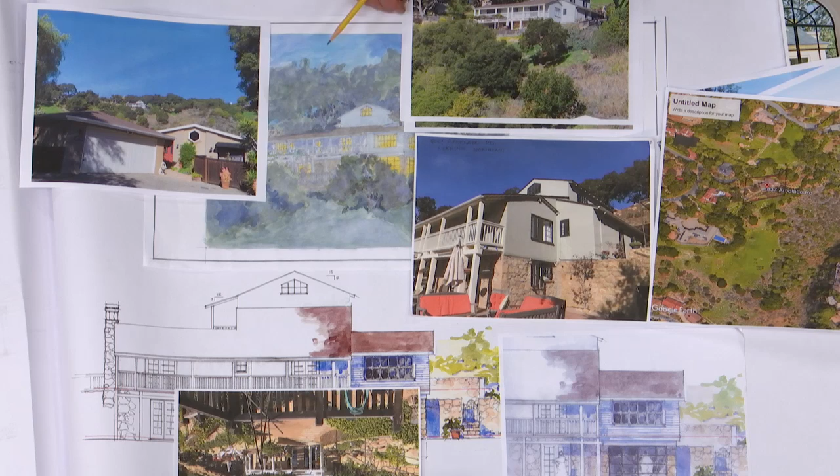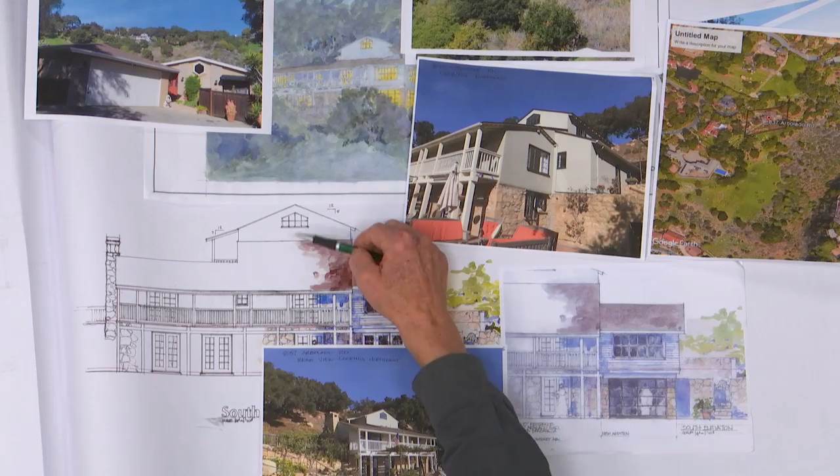It's based on the drawings we had from Mahan Sharp. Okay, and what you end up with here is vertical, and you've got horizontal here. It's questionable - I question my own comment. No, they're vertical, they look vertical here. By the time you make this window the size it is, this is much wider, and you're going to end up with even less here.

Are you changing that window? No, that's existing, we're not touching that, it's already there. He's just commenting on my drafting ability. I see - he's actually commenting on mine. I just traced it right off the drawings.

I brought it back to the full board to get your comments and questions on the windows, the make of the windows, and the horizontal or vertical position. I have a comment.

I appreciate that you went and studied another approach like we asked you to, and I have to agree that I feel more comfortable that the wood French doors are more integral with the rest of the house, and that the difference with the shiplap and the steel window on top doesn't look as obtrusive when the bottom story is matching the existing. So, I'm having a mental block - in order to save money, it would be kind to the client to go with the wood French doors.

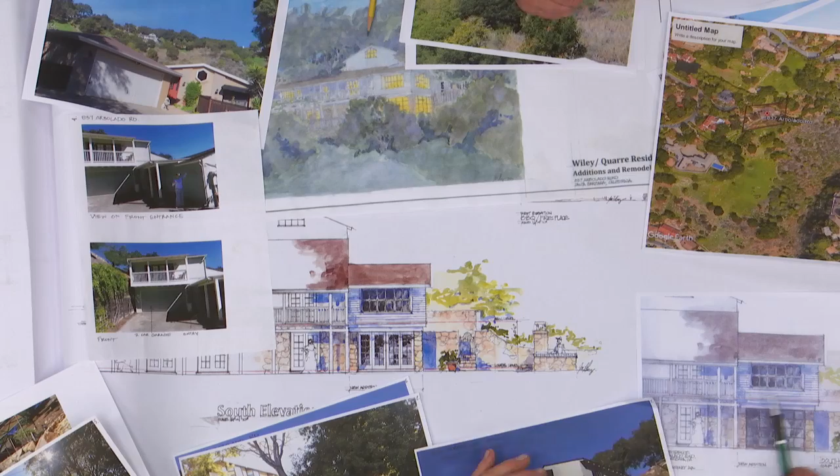Okay, are we going to... I think we should make a motion. Let me make a comment first. I do like this better, to me this is the one that stands out, those horizontal lines and that steel. I think this is a great improvement on the windows, or doors rather, that match the rest of the house. And it's not as strong as this, meaning it doesn't really clash with the rest of the house.

Can somebody make a proposal and motion? I'll make a motion. The board would like to give this project design approval with the following comments: that we accept the entry porch, the one-story dining, and the second-story sitting room, and the outdoor kitchen. There's a preference towards wood doors, but being that the canyon is secluded and you can't see the house from the road, if the client can afford the steel, then that is their prerogative. And we appreciate your extended study. That is my motion.

Have a second? Wait, do we need NPO findings? Can we make the NPO findings, hillside findings, and slope lot findings? Yes, I'd like to note that the neighborhood preservation findings have been met, that the project uses quality architecture and materials, is consistent with the style and appearance of other homes in the area, is compatible with the existing neighborhood, and follows the Good Neighbor guidelines. And it is in the Hillside District, and we find that none of the natural topography is being disturbed, and that the scale of the building is appropriate.